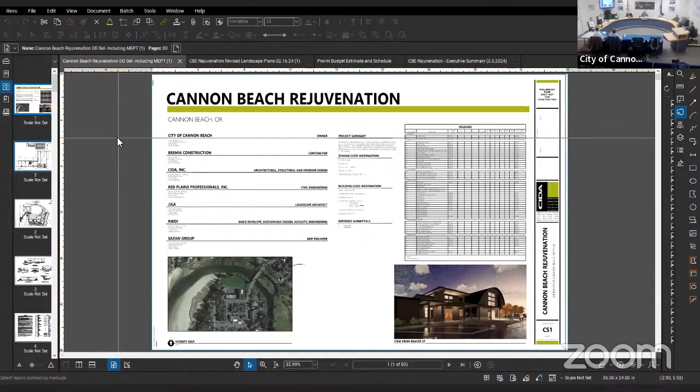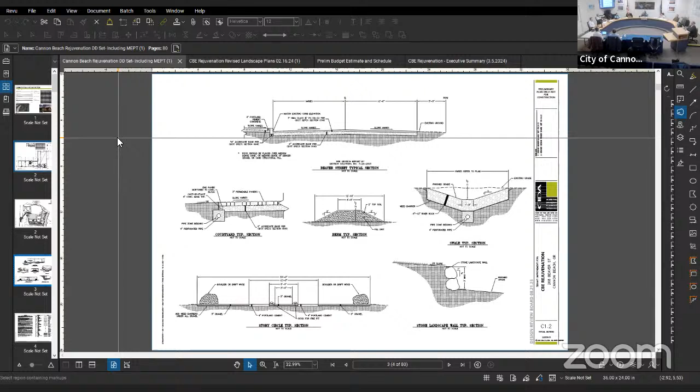We get into our civil sheets. This is a for-reference overall site plan. We get into some construction details, walls, but on the story circle. Some general notes to keep in mind throughout the civil set and a legend.

This here is a demo plan. This is a good one to take a look at. It shows very clearly what is proposed to be removed from the existing site. This crosshatch up here indicates asphalt.

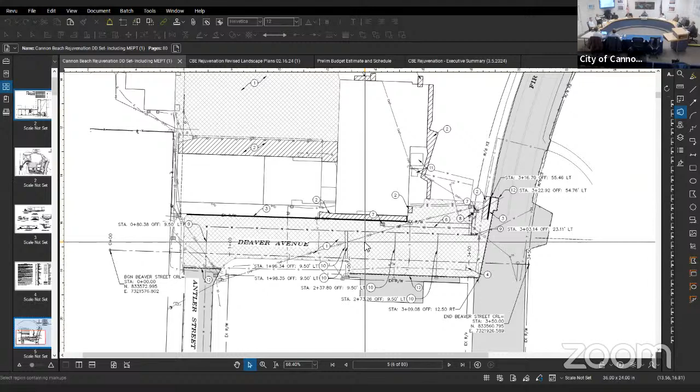So we have asphalt in the north courtyard, and we have asphalt down here in Beaver Avenue. All that in this set is being proposed to be removed for further treatment as defined later in the set.

Okay, moving on. This is another site plan, civil site plan. This one has keynotes identifying all the major civil elements that are then associated with details for further clarifications.

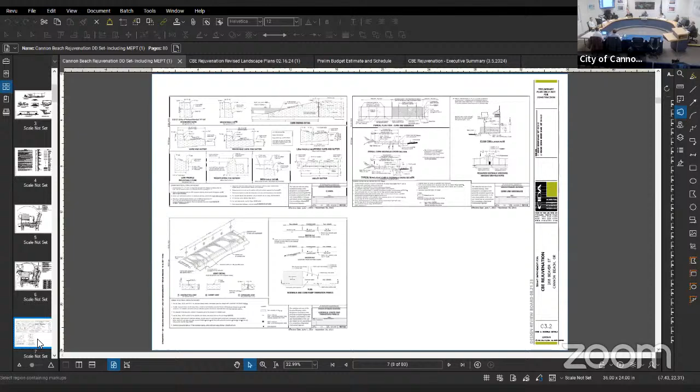Details on ADA access ramps, or ADA access ramp details, signage details, hardscape painting details like crosswalks.

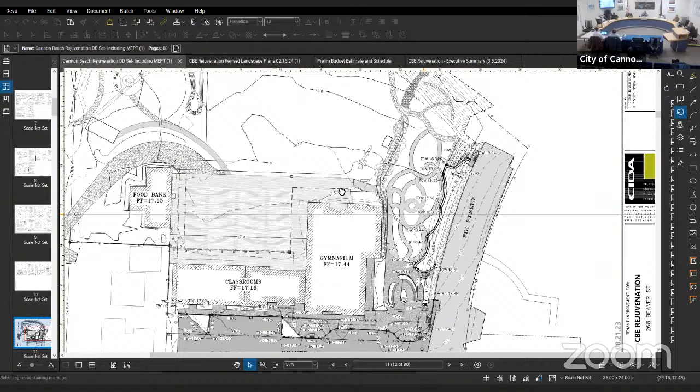Here we get into the grading plan. This would be another good one to look at. One thing I do want to clarify, you're going to see Thunderbird Garden in here as well as the former site layout. Again, that has not been approved yet. We're coming back next week and requesting formal approval through the hearing.

This drawing set is a snapshot in time, and that is around the end of October last year. A lot has happened between now and October, but this is the set that has been priced that we're presenting a budget on.

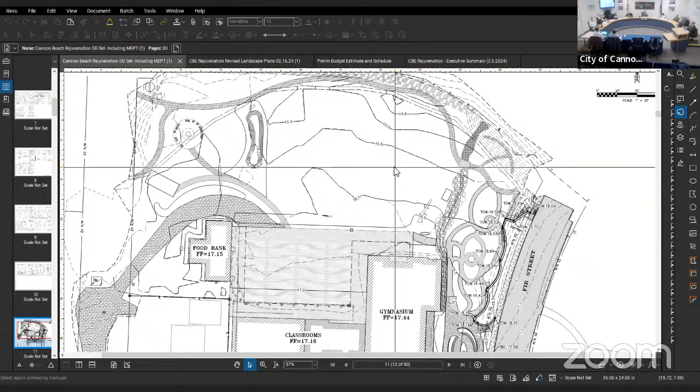Utilities, site utilities. Just a note here, because of the right-of-way partial acquisition of Beaver Avenue into the project site, this sheet is going to be showing relocation of the water line. That water main is currently located closer to the school structure, so that is having to be located out further into the right-of-way and then repaving that right-of-way.

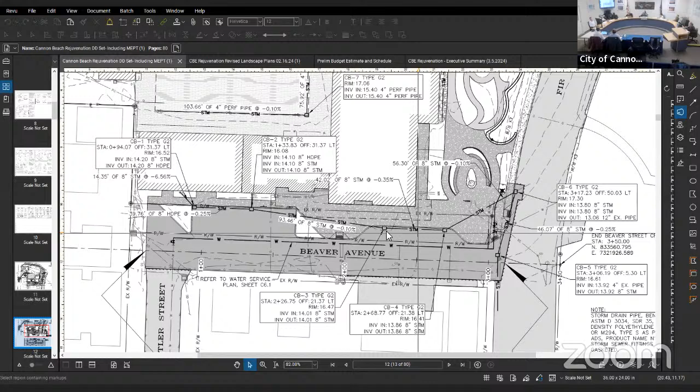This sheet will likely go away in its entirety since we no longer have the Thunderbird Garden or this faux stream that's collecting stormwater.

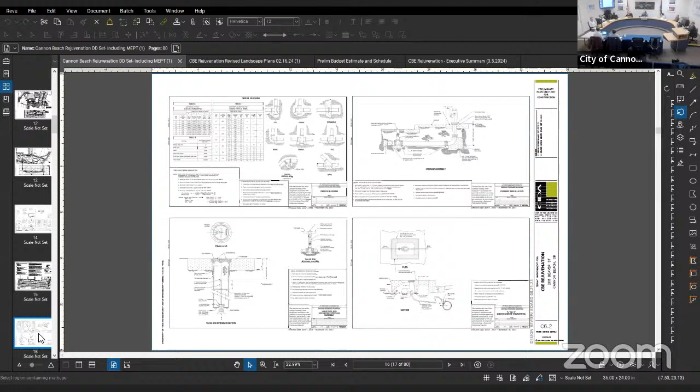Site conveyance details, additional site utility details, this time specific to water service to the building. Water service details, and then we get into landscape.

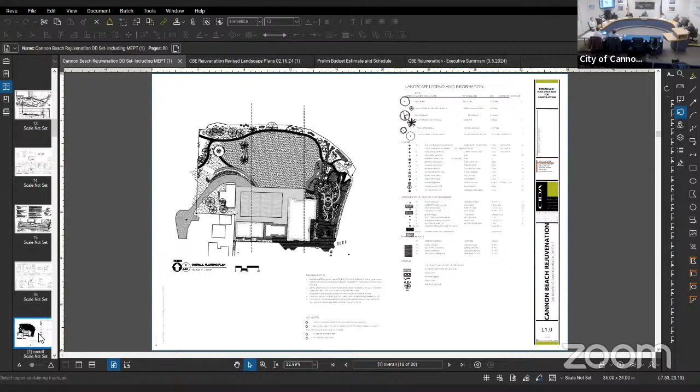All of these landscape plans are going to see heavy modification pending approval of the revised design next week. I do have those plans available as you saw them a couple of weeks ago, ready to pull up, toggle back and forth if needed for discussion purposes. Go ahead and buzz past all of these landscape drawings.

We get into the architectural site plan. It doesn't reveal much more at this level than the civil site plan.

These next few drawings we consider base drawings. These would have been drawings that are presented in the schematic design set. So from schematic design to design development, there's a little more development. For example, up here, we've got different wall assemblies for the exterior walls. That helps Bremik then take those construction elements and give a more realistic price to deal with the schematic design set.

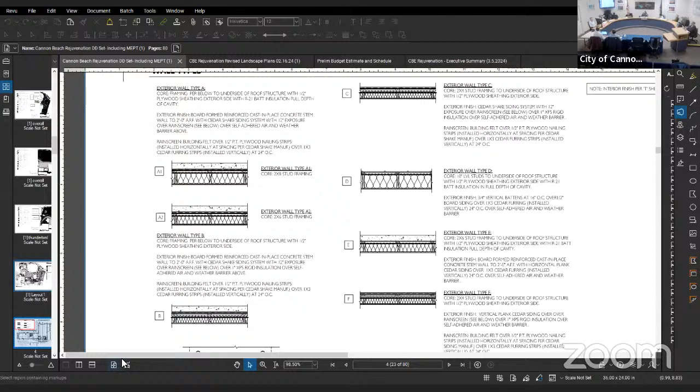Mezzanine plan, our new stair. This is our roof plan, showing existing TPO system to remain, new TPO, which is a single ply membrane roofing membrane, that is being applied over the heritage lobby, and then our standing seam metal roof over the gym.

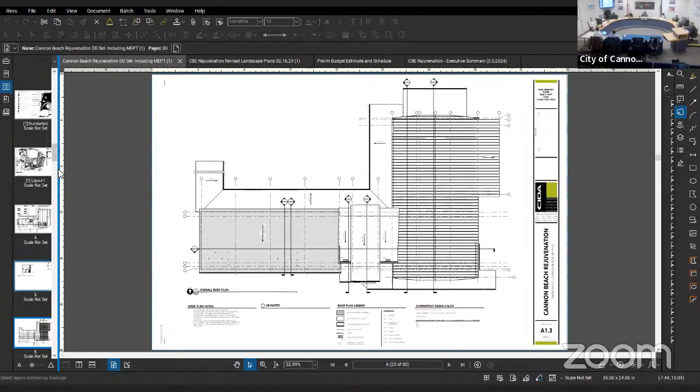Elevations, which look a lot like our schematic design elevations, with the exception of we're now getting a little bit more into the details of what those materials are, and that's in our elevation material legend.

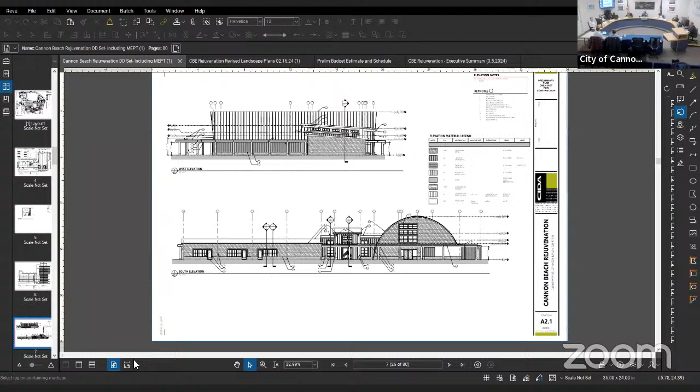More elevations, then we move into building sections. Most of these are transverse sections through either the gym or the classroom building or the lobby. Our next sheet is longitudinal sections that cut through all three structures. This gives a good overall sense of the space and how each building is connected.

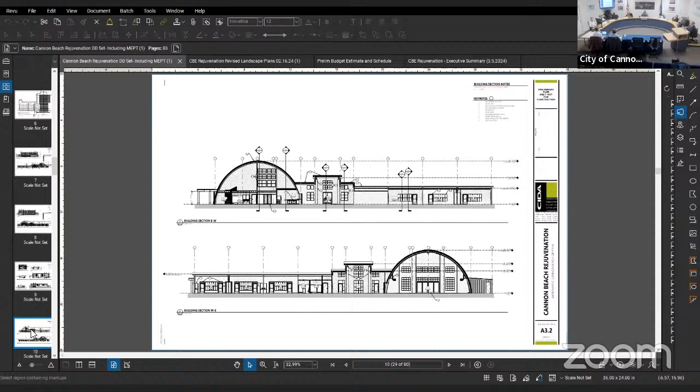And then we go into a zoomed-in detail of that with individual wall sections in these next couple of sheets. You can expect in the next set of drawings that you see that there's going to be substantially more of these types of drawings, from wall sections, and then even further into the detail sheets where we're really starting to figure out what these systems are, how architectural relates to structural, structural relates to mechanical, and the details of how it's all assembled.

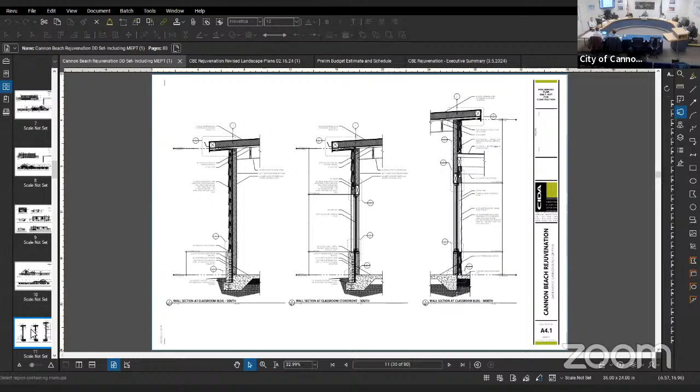More wall sections. This wall section here in the center, I'll point this out because this will be new to council. The canopy that runs along the gym in the north courtyard, for seismic purposes, we would propose that we keep about a foot clear between that canopy, the edge of the canopy, and the roof of the gym.

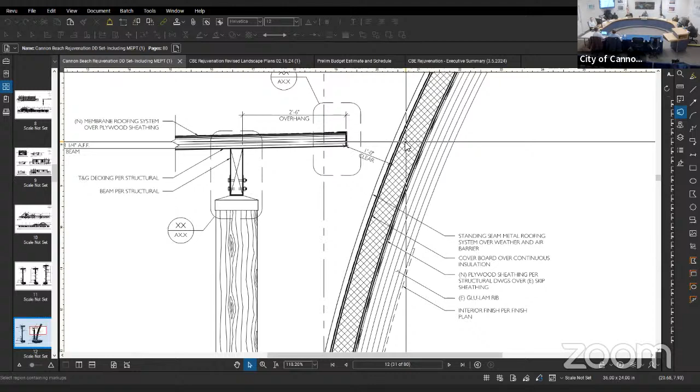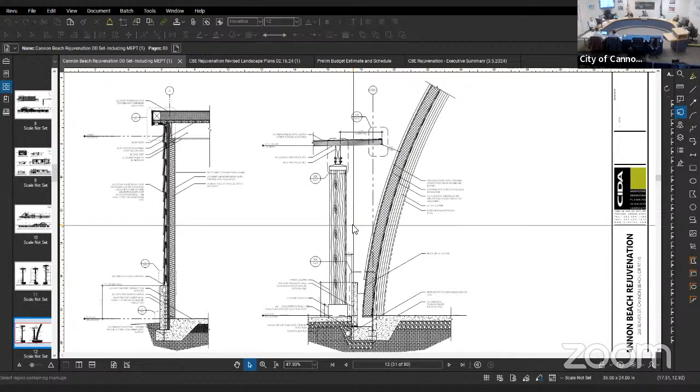The reason for that is the gym is much taller than this structure. Their periodic frequencies differ, so when the ground starts to shake, they shake back and forth at different rates. We think this is okay because we have plenty of coverage over the walkway itself, so you won't find people wandering between this column and the edge of the building where you'd start to see a little rainfall against the building. We still plan on full coverage there.

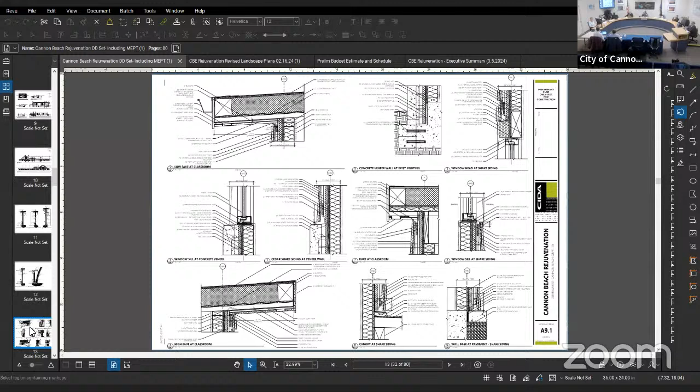As we move on, these are now further zoomed-in details of how we anticipate all the construction elements to come together at soffits, openings, wall bases, etc.

These T sheets are, the T is for tenant improvement. This is where we start to zoom in more into each of the buildings, the classroom building and the heritage lobby on one sheet, gym on its own sheet. We do that so we can get into more detail on the interior construction elements, what materials and systems are used.

You're going to see things on here that you haven't seen before, and I want to point these out. You see these rhombus shapes in the classrooms. This was a proposed acoustical treatment in those rooms. You'll see when we go over the budget that it's not in the budget.

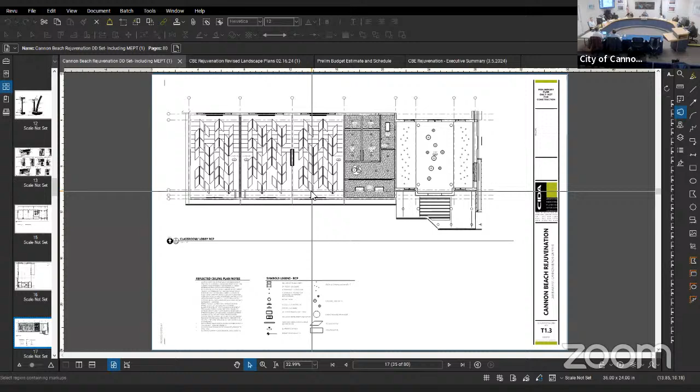So I'm pointing this out because it's something that will be modified, and you likely won't see this in the next round of drawings. More on that as we get into the budget. You'll see a bit of that here in the gym reflected ceiling plan as well. In addition to the acoustic treatments, you also see lighting placement.

And these are floor finish plans, so each hatch has its own respective floor finish. These floor finishes will get defined further as we go through the budgeting analysis, and start to figure out areas where we can tighten down to meet budget constraints.

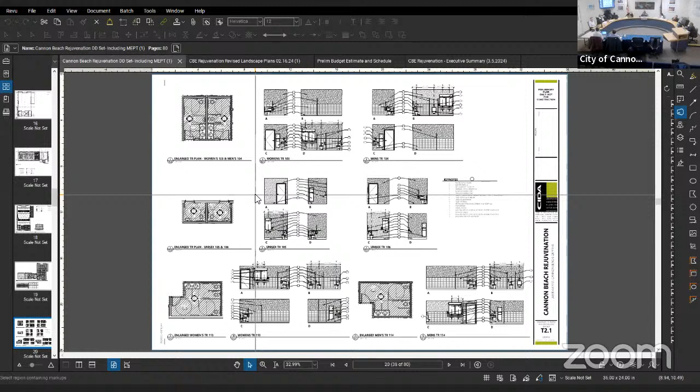Same thing with the interior elevations and large elevations at the bathrooms, and that's what this is. Right now you're seeing a lot of tile in these rooms, and we'll talk about cost saving measures for that as we get into the budget discussion.

Same thing with the roof framing plan, mostly focused on the heritage lobby addition as well as the canopy structures in between, and just the framing members, the beams, the sheathing. In some cases, what we call T&G decking, the solid decking above our heritage lobby, so it can be exposed to view and have a nice wood finish.

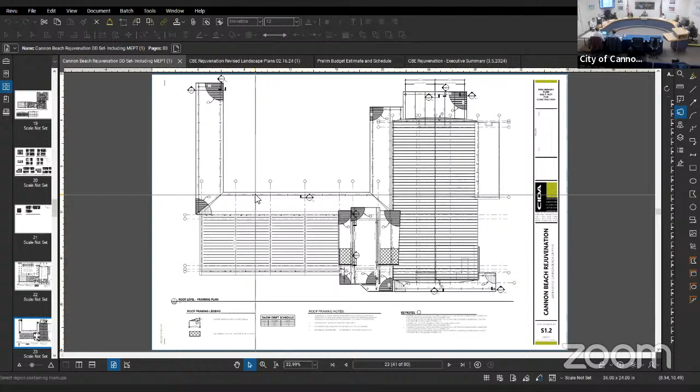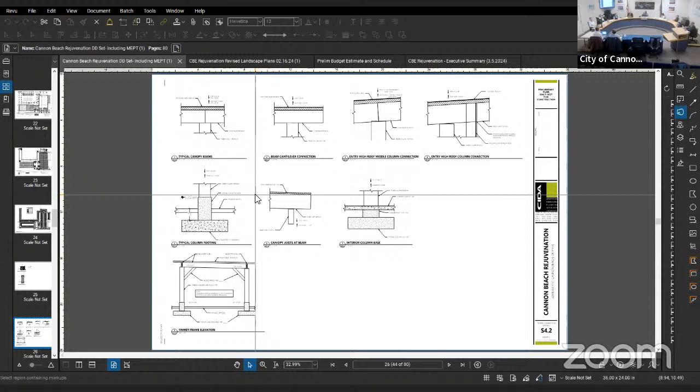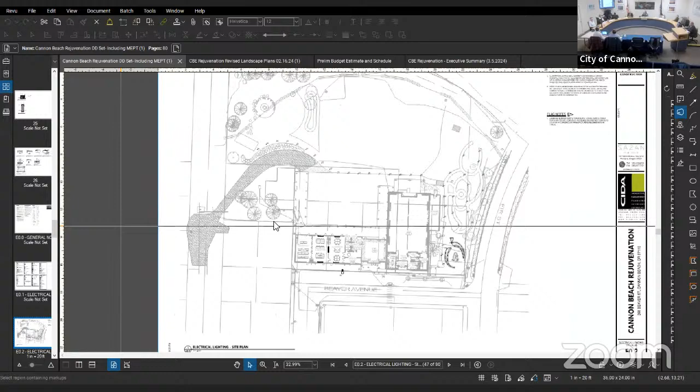Site lighting plan, this is another plan. You're going to see a lot of site lighting here that you'll probably see us start to move away from, to eliminate. We've talked a bit about site lighting as part of the adjusted landscape plans we reviewed a couple weeks ago, and we'll review again next week at our hearing.

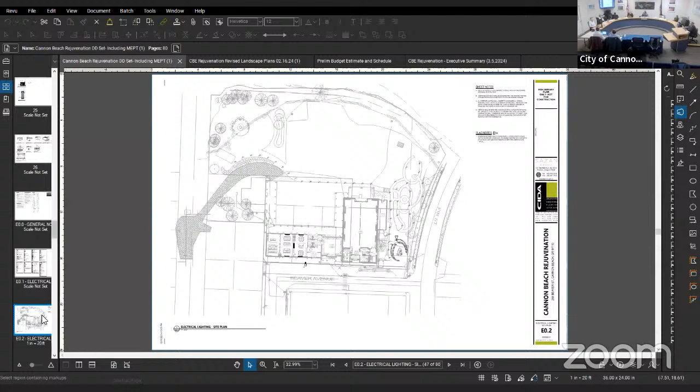We're almost through these. Electrical site plan just shows where the electrical is coming in, which is the same place it currently is. We're expecting at this point to have a 1200 amp service, and the main switchgear for that service will be located in the lean-to to the gym.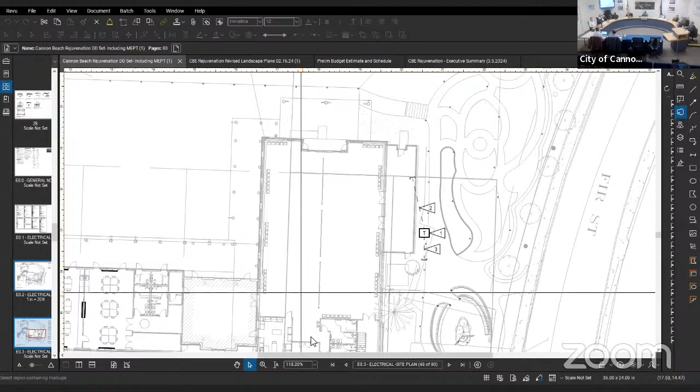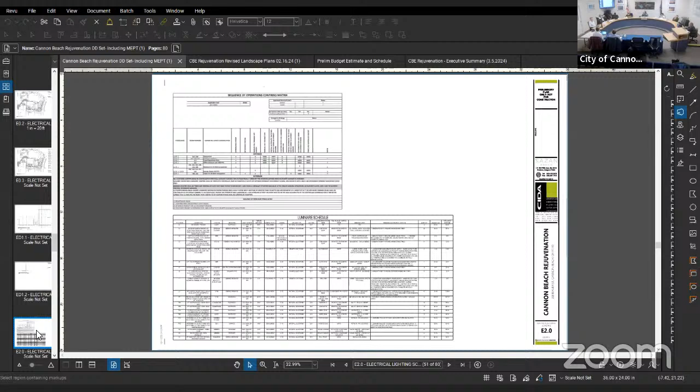Electrical demo plans that'll get populated during construction documents, electrical legends, size gear.

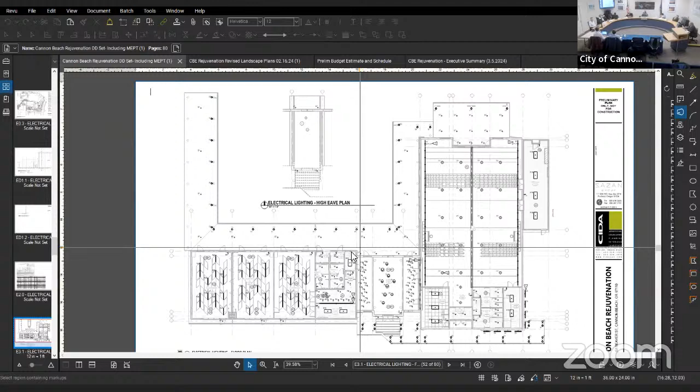This is a good plan for us to take a quick look at, again more in relation to budget. This is what Bremik has budgeted, and you'll see that we have recommended cost savings measures that would result in cutting back on some of the light fixtures shown in this plan. So expect some pretty heavy modifications to this plan moving forward.

Power layout for the classrooms, for the gym, for the kitchen, for the mezzanine. No electrical on the roof plans.

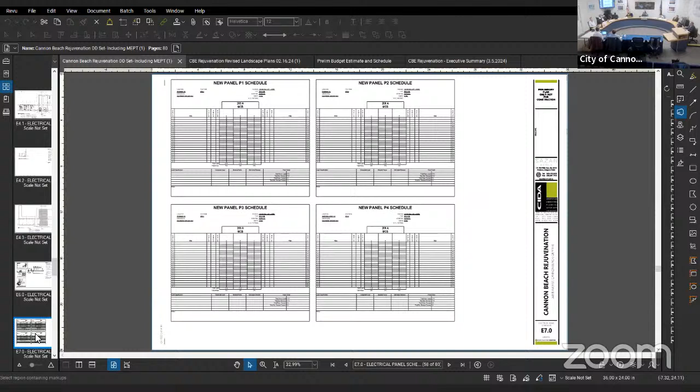This could very well go away, this sheet. And then we get into one line diagrams for electrical. And then these tables here for the new panels that are expected, that are branching off the main switchgear, will get populated as the circuits are developed during construction documents.

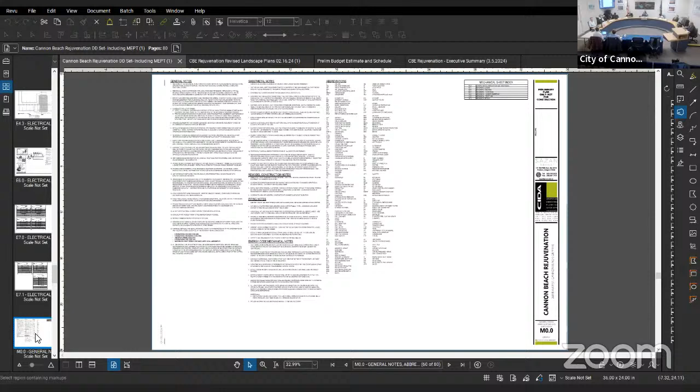And then mechanical. There's only really one sheet on mechanical I want to pause on, and that's this sheet here. So mechanical for this building is proposed at this point to be pretty simple, and it's comprised of 2 ERV units, one of them located in this storage area off of classroom number 3. These are electric resistance units. They get their heat through electric resistance. There's no cooling capacity, so the coolest you'll ever feel in this current system is the temperature of outside air.

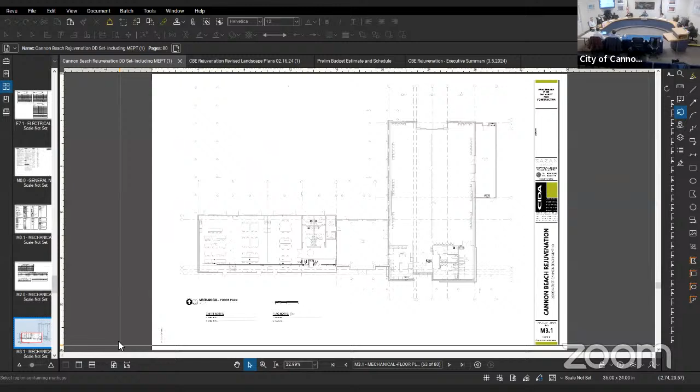You'll see in the budget estimate that we present tonight, there's an option to go to a VAV type system, which allows for both heating and cooling. And it's quite a bit of an add. We'll talk about that when we get to budget in more detail, the second of the ERV units.

This first one here just serves the classroom building. The second one's located up on the mezzanine. What's not shown here is that this actually branches over to the left into the Heritage Lobby and serves the Heritage Lobby. And then there's a single duct, as opposed to the two shown here, that will run out the full length of the gym. Return air will just be handled through a large louver in the wall of the mezzanine.

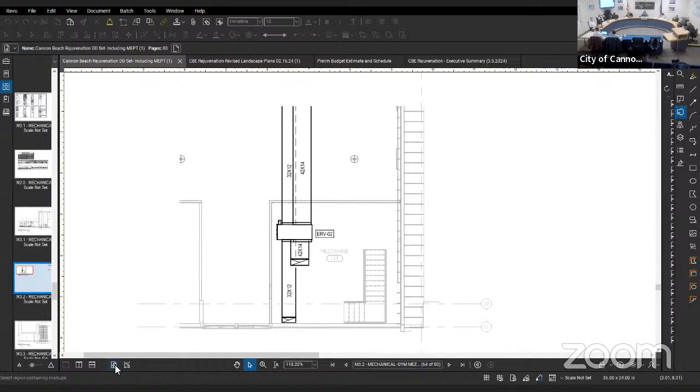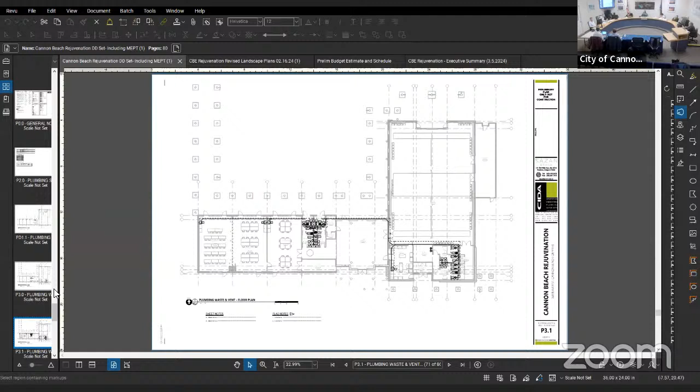And then expected mechanical details, plumbing very much the same. Plumbing demolition plan. Plumbing routes for a new sewer and water distribution, primarily at toilet room locations and drains in the kitchen. And then vent details and other miscellaneous plumbing details.

This last is telecommunications, which is really just sheets being populated for further development.

And that's the DD set. So are there any drawings that I skipped past that you would like to go into further detail on, or do you want to start the discussion on budget? I'll remind you, or suggest, that as we get into budget, inevitably there's going to be drawings that we're going to want to go back to discuss. This is what we're proposing modifying, and we'll go into more detail into those specific drawings at that time, but happy to revisit any drawings that I may have skipped over too fast. Anyone have questions?

Okay, thanks for sticking with me through that. That's pretty dry, going through technical sheets one by one.

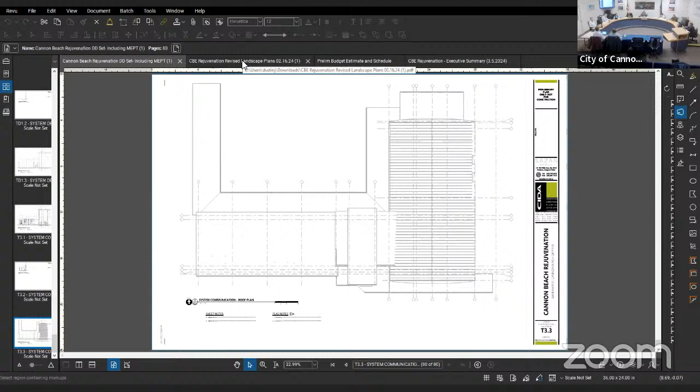As a reminder, here's the updated landscape plan that we'll be bringing back for formal approval next week. And then as we get into the budget discussion with the landscaping, we can always come back to this.

All right, and so starts the discussion on budget estimate. I'll turn it over to Ben. Okay, thank you everyone for having me here. So my name is Ben Carlson with Bremik Construction. We've been collaborating early on with CIDA and the city to work with a project and come up with a successful project for the Cannon Beach Elementary School.

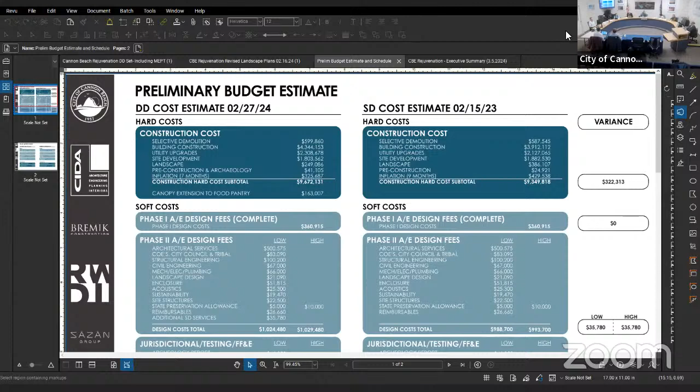What you'll see on the screen here is two different cost estimates. The right side is the SD, which is schematic design cost estimate, and the left side is the DD, which is design development cost estimate. So the DD estimate is the most current estimate.

Before we dive into it too far, I want to talk a little bit about process. So in construction projects, there's a series of milestones where there's different drawing issuances that progressively get more detailed throughout the project. At schematic design, oftentimes we're working off of renderings or photographs, and in this case, there were narratives for some of the scope items. And so as you step through the next milestones there, from SD to DD, you start to get more developed. You see the drawings that Dustin shared on the screen just recently. So those are developing quite a bit from the SD set.

The next milestones will probably be a 50% construction document set and then the final permit set. So it's a series of checks along the way so that we can see how the design is evolving and also how the budget is performing in relation to that design.

So when we, as Bremik, develop a cost estimate, since the construction hard cost, which is the actual tangible construction piece of the building, takes the lion's share of that estimate, we take it very seriously as far as how we develop those. So we take the drawings, we will do our own internal estimate and base our own historical data on that.

We also take the opportunity to share those drawings out with a different trade partner in each of the major trades to test the current market conditions for those trades and get a current understanding of the cost estimate for those individual items.

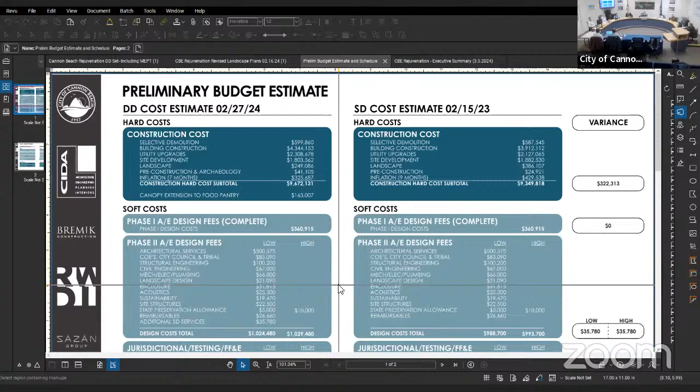Right, so the numbers don't align up exactly between the two, because on the screen here, some of those costs are blended between the landscape and site development lines. For example, the modular pavers in the plaza area would be considered a site development item, where in this case landscape was that. So it's really some blended items in order to keep it at a more summarized level on the slides you're seeing here. So there is a little bit of crossover - it's all there, it just depends on how it's fed into which bucket. Good explanation.

Can you just explain the second item, paint gym structure in lieu of media blasting? I'm sorry, I live in this world all the time, I didn't mean to glaze over anything. So when we initially met and looked at the site, we collaborated and anticipated that the existing gym structure would be media blasted - nobody calls it sand blasting anymore because it's not silica, there's other media used for that. So it's a process to remove the existing paint from the gym, which would expose the wood structure that's there, and there's a cost related to that paint removal.

As the more cost-effective option, looking at how the space was, the decision was made to not remove the paint. There was also a concern from the structural engineer that removal of the outer edge of the material would be negative for the existing structure. So in lieu of that, the decision was made to paint the existing structure, which resulted in a healthy cost savings.

And can we keep going on the third item, the exterior doors for the classroom? Certainly. Do you mind pulling up the plan? That'd be easier.

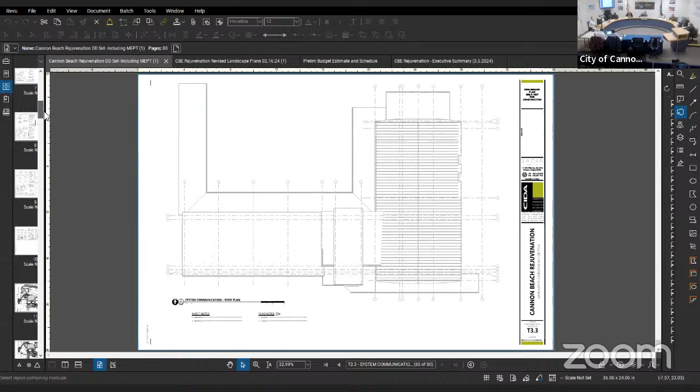If you zoom in on the classroom, on the top side there were two doors out into the courtyard area, and on the bottom side there were doors out into the Beaver Street side. Looking at areas where maybe there was more than what was needed for it to function successfully, we can eliminate those doors and make that new solid wall siding, similar to the adjacent structure. It could be modified from the project without overall affecting the functionality. I'll add that this was a program-driven want to open these classrooms up as much as possible to the north courtyard.

The third door, in each of these rooms, is not a requirement to meet egress. What would you replace those with, a window or the wall? It would be reconfigured in the elevation, so the exterior view would be a solid wall section. I think that would just be a slight revision to the configuration of the walls and doors so that it made sense aesthetically.

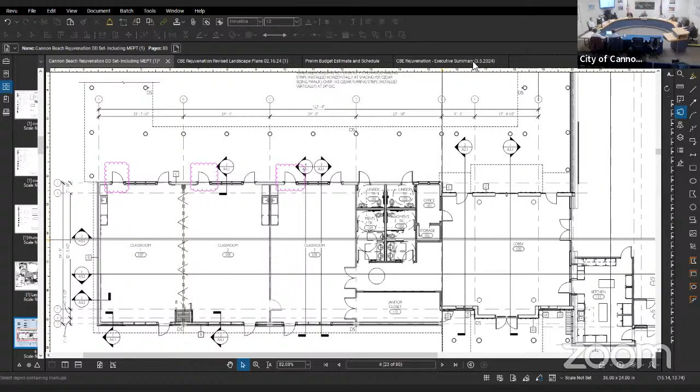I think the next couple items are obvious, on the reduced lighting. This is pretty common to see in projects, where the wish list of lighting comes in sometimes more than what the budget will allow. So we regularly work with the electrical engineer and designers to either reduce the number of fixtures, or select alternate fixtures with a similar aesthetic to meet the intent of the space at a lower cost point. This is what we call target value design, where as a team we've identified that a 25% reduction from that increase is very achievable, so we'd work with the CIDA team and the electrical engineer to identify what those are.

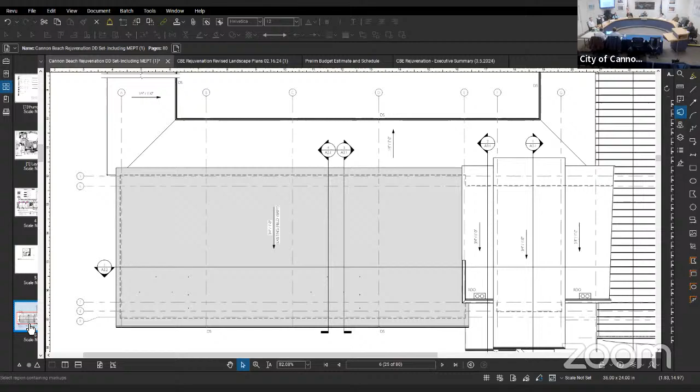Okay, reduce exterior precast concrete cladding panels. Right, I have to remind myself, we've looked at these drawings so many times and you all just saw them, so apologies for going too quickly over that. Dustin will zoom in. There we go. You're doing great, by the way. Thank you, I appreciate it.

You'll see this band at the bottom, about a 2-foot tall section of precast concrete. That would be a board form type section of concrete brought in and run along the base of the building. That's at a higher price point than just the shingle siding or board and batten siding we're seeing elsewhere. So that's one where we looked at where it could be removed from the skin without affecting the performance of the building, or how it could be redetailed for a cost savings.

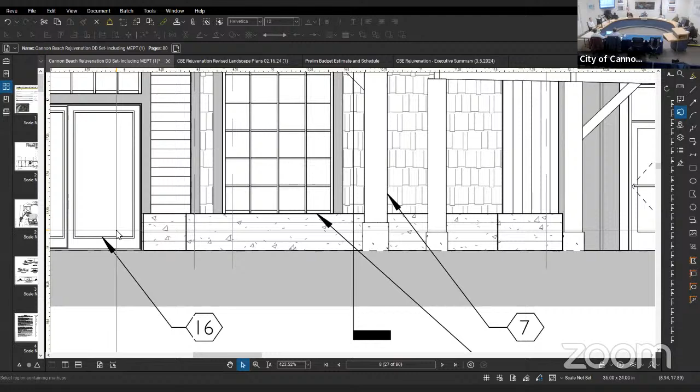I think that answers most of mine. Anyone else? Thank you. Thank you.

Just one question, are you anticipating in the washrooms where you're changing from tile to concrete, having that concrete colored? It could be, there's a modest price increase for that, but not nearly as significant as the reduction, probably a couple dollars a square foot increase over polished concrete. We do both regularly, and either could look fantastic. It's a lot lower maintenance than tile, you don't have to worry about grout lines. It's a very durable surface, and CIDA has a great interiors team who could make good selections and recommendations for us about how to make that look great.

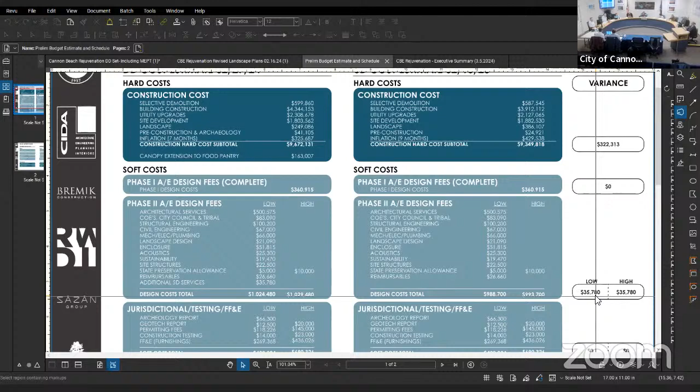We've got a state preservation allowance on here, reimbursable expenses, all of those you'll see on the right-hand side. There's a $35,780 difference between what was presented a little over a year ago and today. That $35,780 was the result of a single change from what was presented before, this last item here, additional SD services. That was to allow the CIDA architectural team to continue to spearhead the schematic design process months beyond what we had originally intended that duration to be. Other than that, these fees all remain the same.

These jurisdictional testing and FF&E fees are estimates. They were estimates at the SD phase, and they continue to hold true through the DD phase. They include things such as the archaeology report, geotech report, but the higher dollar items are jurisdictional fees like permitting and SDC fees.

And then you'll see a large ticket item here, the FF&E, furnishing, fixtures and equipment. Things like site appurtenances or special fixtures. Maybe that holds some tribal or cultural interpretive elements could come from that bucket, and also possibly cabinet work.

That brings our total to 11 million on the low end, 11,537,920, as compared to the previous low of 11,179,827, for a net difference of a positive $358,093. That same net difference carries over at the high end, from 11,752,852 to the previous 11,394,759. Then we take 5% of that number for owner contingency.

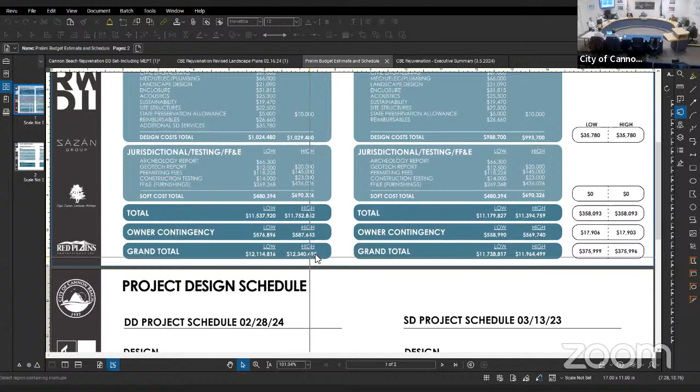So again, there's a low and a high, and that contributes to the grand total of 12.114 million at the low end to 12.340 million at the high end. The net difference from almost a year ago is 375,999 at the low end and 375,996 at the high end. Are there any questions related to the soft costs?

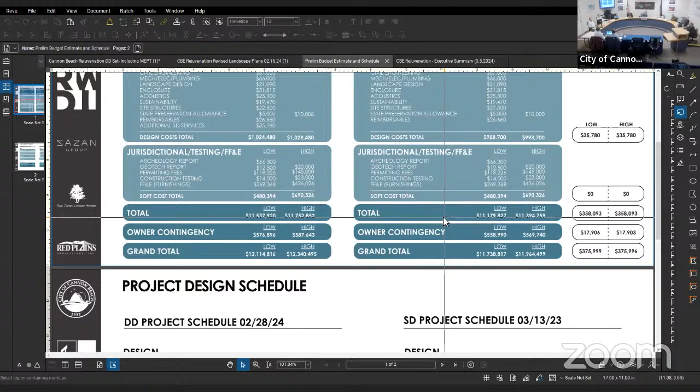No surprises in any of it? As far as the soft costs? The only surprises would be - and we're gonna talk about schedule next - but I think hopefully we're at the end of the schedule slipping significantly. Right, and now we're committed to moving forward with construction documents, construction.

I have a question, please. Have any archaeological reports been generated yet at this time? There is a preliminary archaeological report from the study done this past summer. It's currently being finalized, and we expect that report to come out in the next month or two.

I heard a lot of people sound as if they're concerned about plumbing causing digging to happen, and that it might impact Native American burial sites, et cetera. Do you see that as an issue?

I can take this one. So it's not uncommon on a project to have what's called an inadvertent discovery plan - we'll implement procedures around any sensitive areas to not disturb any sensitive or known areas. But if for some reason something is found, there's a procedure for notifications, and work is stopped so that there's no disruption of the site.

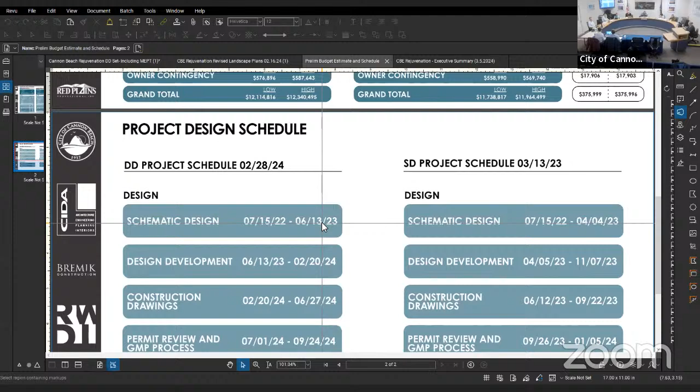So moving into the design schedule, again DD is on the left, schematic design is on the right. You can see schematic design was extended beyond what was anticipated. It was planned to be completed April 4th, 2023, but that carried on to beginning of summer 2023. Design development then started; it was originally planned to start April 2023 and carry on to November. In actuality, it started mid-June and carried on through February of this year.

Construction drawings, we have on here a date of 2/20/24 to start on construction drawings. In SD, we had anticipated starting on those summer of last year. Both of these are for an approximate duration of 3.5 months.

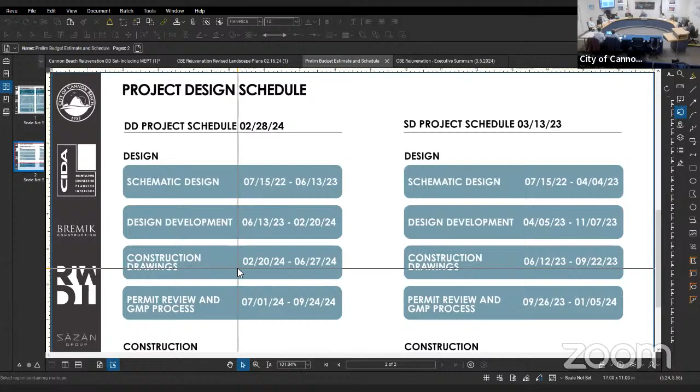I want to point out the 2/20/24 date on construction drawings now. You heard me asking for authorization to move forward with construction documents at the end of our 3/19 meeting, or fairly close to that. I can still commit to this 2/20 date and being complete by 6/27/24 because we take on a little bit of risk that we feel comfortable with in areas that don't have a lot of or aren't expected to have a lot of change, like seismic retrofits for the gym classroom building. We are working on those right now, so we haven't lost time yet. That's why there's a discrepancy in the 2/20 date; we've at some level taken risk and moved into construction documents in areas where we feel that risk is worth it to keep the project schedule on pace.

So how much longer after March 19th? Just ballpark, a week to two weeks.

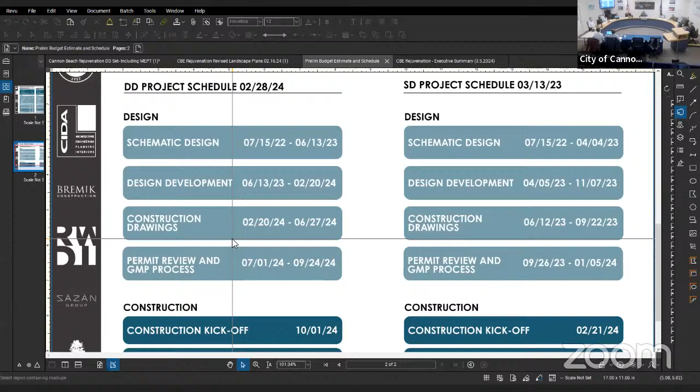And then permit review and the GMP process, estimated about 3 months and a week previously. That hasn't changed substantially, it's just the date at which it starts. We had the permit review process starting at 9/26/23; now it's more like July 1st, 2024. And that puts our construction kickoff to around the 1st of October this year. Previously anticipated over a year ago, we would already be in construction right now.

And then the construction end, it's an 11-month duration. I'm carrying 11 months as the construction duration based on the DD set. So we were carrying 10 months prior, a year ago, but now with the modifications to Beaver Avenue, we've added a month to that timeline, so now we're tracking an 11-month estimated construction schedule.

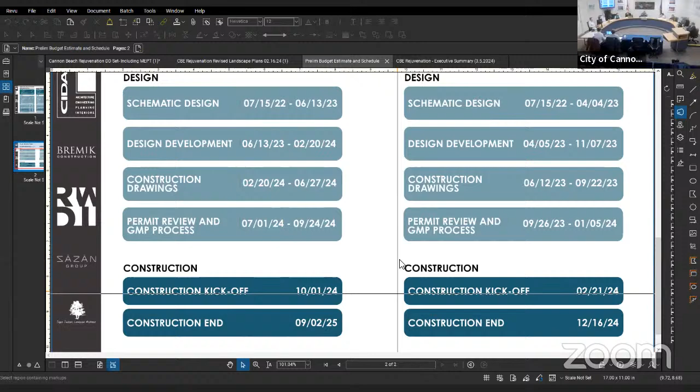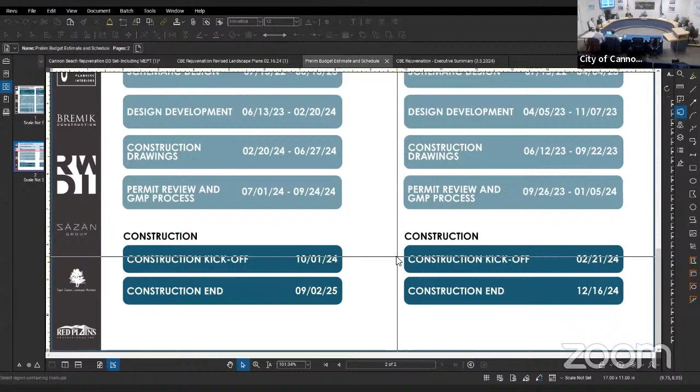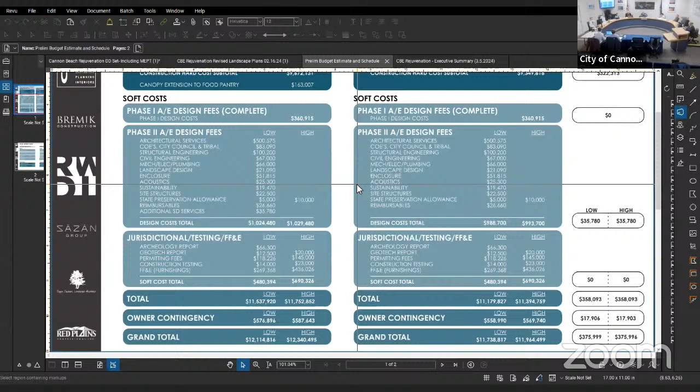And the delay, those increased costs are reflected in the hard cost budget that we looked at. They are, yes. The DD estimate includes the cost for that additional month. Is that the inflation number or construction? It's the two - general conditions and general requirements, things like supervision of the project. So it's an additional month for those types of things. And then fixed costs were rental costs for temporary fencing and on and on.

That concludes our presentation, so we'll just open it up to further Q&A. Anybody have additional questions?

It was nice to be able to ask them as you went. Oh yeah, I appreciate your explanations, because the drawings for me, I don't know how to look at schematics for lighting or plumbing, I don't know what those mean. So your explanation was pretty user-friendly, I appreciated that. And we'll continue to do that. These drawing sets don't get smaller, they just get bigger and bigger. I think Brandon's probably the only one who really knew what he was looking at. Oh, completely, I had it all figured out. It's quite complicated. Yeah, it really is.

So I did have one question. You mentioned there were some changes in the classrooms. What changes are you making in the classrooms? So we have these really beautiful renderings to show you all of the classrooms with really nice ceilings and lighting options and acoustic options. And with the budget being where it's at, there's just no chance that they would ever be implemented.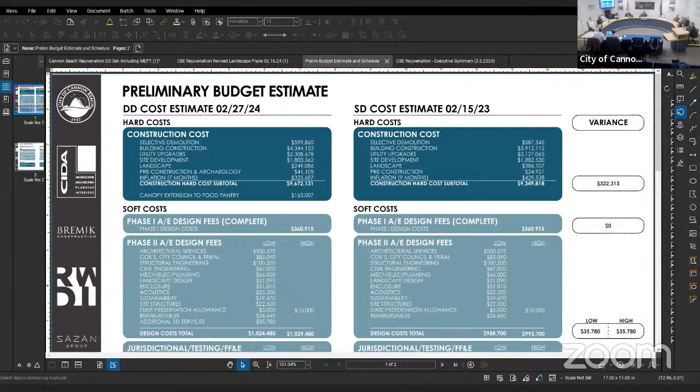But scope reductions, second to last item, gym and classroom equipment reductions - where did you find savings there? That was looking at consolidating and removing some of the items like large format projection screens, overhead projectors, and kind of taking a different look at how some of those items could be accomplished, with a lens towards looking at overall cost reductions for the project.

And then do you have a brief summary of the last item, the miscellaneous design and material refinement? That was all the ones that would have made the list too long to put on one page. So it's really just kind of how things were looked at too. An estimate always goes up and down between projects, or in this case between milestones within the project rather. And in this case it'd be some things where maybe we'd assume something that didn't actually come to fruition in the DD set. So it's really just kind of an amalgamation of a bucket of items that are there, and it was easier to show it as one consolidated item than a whole bunch of those. If it was important we could add some more specifics to it, but generally it's really just looking at how things were anticipated versus how they came in.

So I think it's a reflection of some responsibility on the design and construction team to look at things a little harder. I'm trying to remember, at some point the gym floor was mentioned - was that correct?

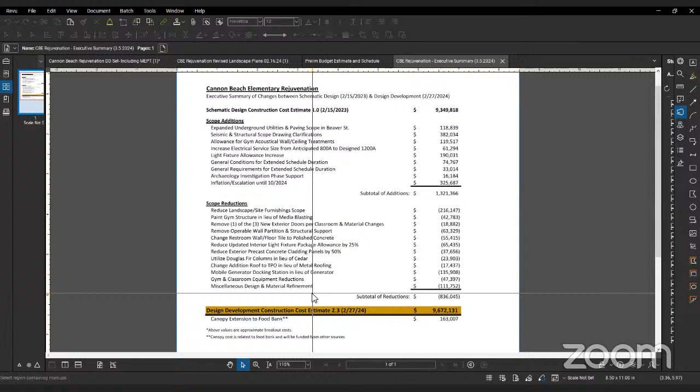Are you there, Mya? Sorry guys, it kicked me out for a second and made me rejoin. So are you there? Yep, we're here.

Hi guys, so Dustin already hit some of my bullet points, but the flooring we've specified is a very multi-function flooring because of the various types of things you want to do in that gym space. It applies to all of those: it's got athletic qualities, acoustical properties, and lower maintenance. And to Dustin's point, if you're putting chairs and tables out there, it's not going to indent the flooring with permanent divots. So it's really a best case scenario for any kind of function you want to do.

And you said it had a padding under it, so instead of being sprung itself, yeah, it in and of itself is a cushiony type of material. So it's not a separate padding, it's integral to the material itself, and that's where it gives some of that cushion. Again, for sports, if people are running around and fall, it helps with that. And that's where you get that acoustical value too, because of the soft nature of it, there's some sound absorption to it.

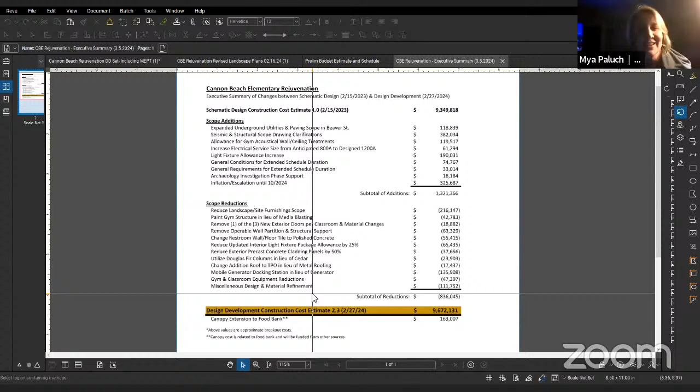Are we talking about what's planned now, or a potential modification? What's planned and budgeted for currently is the resilient floor we're talking about. Okay, thank you. And you can put lines on it for sport, the basketball lines and so forth, pickleball, something like that. Yeah, I think you actually see that in our renderings too, typically showing the sports flooring or the sport lines for different games. Okay.

Thank you. We'll need to come back. Thank you, Mya.

We'll need to come back in front of you to present the gym options, the renderings, the acoustic treatment. At that time, we will bring samples of the flooring and of the acoustic options so you get a feel for what we're talking about.

This particular product comes in different thicknesses. You can get it so thick that it feels like you're playing pickleball on a cloud, but we wouldn't recommend that, because at that point you start to leave indents in the floor. So you have to find that balance between comfort and resiliency and having the floor impressions bounce back to flat. That's what we currently have priced, what we feel is the happy medium.

If it's possible, could you name a location where it might be viewed as an installed product? Absolutely. Would it be best to email that over to Bruce and then he can distribute that? That'd be fine. All I'd need is access to it, that's my only request.

I'll get you into any place. Multnomah Athletic Club in Portland, you can walk right in. I'm here for the floor. Thank you, Dustin.

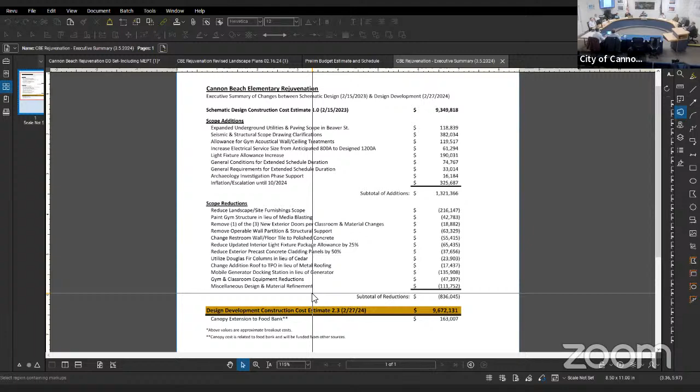Are the pavers, I can't remember if we discussed this, permeable or impermeable? We had envisioned impermeable. The reason is pervious pavers, the more economical systems, tend to get gummed up, especially with traffic flow across them, then they stop acting as pervious pavers and just become a source of weed growth or moss that you have to maintain. However, that is an option to look at if council is interested in going that route and trying to make it a pervious surface. There are materials to do that, but I'd expect an added cost with that.

Pavers are kind of inherently permeable where there's drainage into the gravel base. Yeah, so when they install permeable paver systems, typically they have corners cut out of the rectangular paver, achieving a pattern of unpaved surface, but small enough that you can still drive over it and maintain holding that weight and frequency of load, while offering a higher level of perviousness than pavers without notches stacked right against each other. Special shapes, basically.

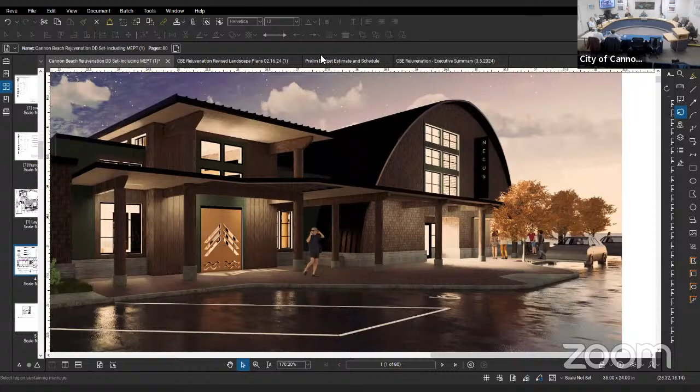But these that you've planned are impervious, that's all I'm trying to get at. I believe that's currently the intent, yes. So I don't think the design has gone as far as selecting a product for that. It's based on the imagery provided here and an assumed cost per square foot for those pavers.

One thing that's nice about a paver system is that you can replace those pavers individually should some get damaged for whatever reason.

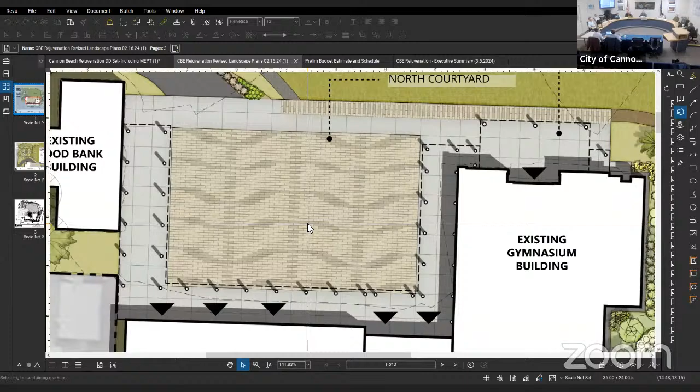This is just some information I got regarding our discussion last night that I wrote to Bill this morning, and he got back to me right away. I was so grateful. It was really great, he's just really busy now.

And I asked him whether the state needs to be involved in any manner when you rewrite a tree ordinance, because they did have to be involved for the wetlands ordinance. And he said no, they do not. It's not a state issue. A municipality can rewrite the tree ordinance like we did.

What was it, 8 years ago when the planning commission did it, when I was on it? I don't think we did a great job, but we did it. And at that time, yeah, I guess that was sort of like the thinking at that time.

Right, looking back at it, I'm like, oh, anyway. But yeah, he did say the reason wetlands involves the state is because they're regulated by the state and the state keeps the wetlands inventory, the Department of State Lands, I think it is. I can forward you his email if you want more clarification, but that's basically what he said. Less of an issue whether it's required and more of an issue of wouldn't it be a good idea to have a housing zoning expert look at what the impacts might be on potential housing.